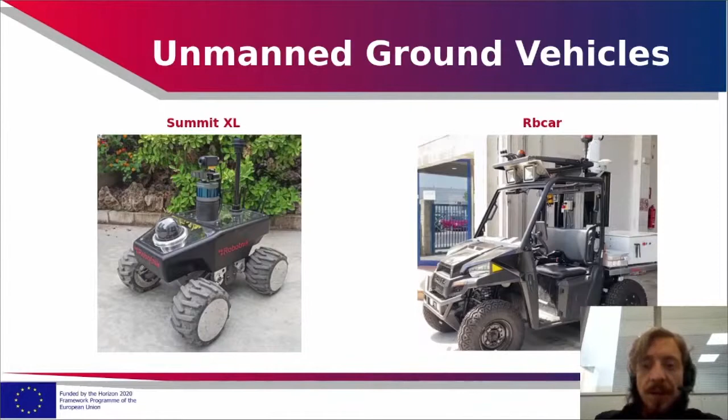These are the two UGVs developed by Robotnik for the FASTER project, the Summit XL and the RB-Car. Both platforms form part of our product portfolio right now, not at the beginning of the project, but right now, yes. Both have been sensorized, taking into account the requirements from the first responders and also the requirements from the pilots of the project. Let's see in more detail the features of the Summit XL.

This UGV is smaller than the RB-Car, and it has a payload of 65 kilograms. It has a differential configuration with 4 traction wheels with 500 watts of power. The Summit has been designed and built totally by Robotnik from scratch, so it's our own unique model, let's say.

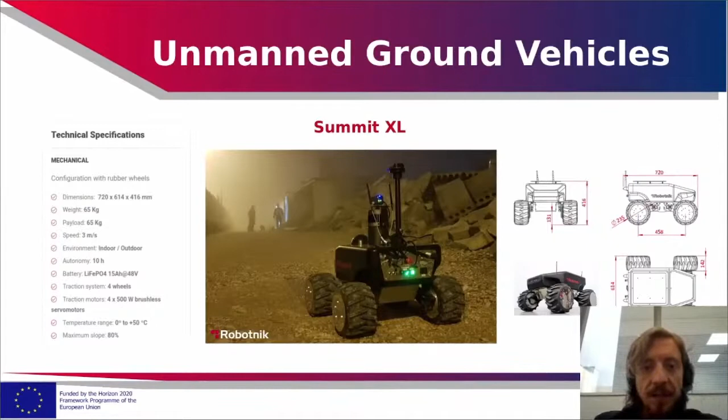These are the sensors integrated into the Summit XL: a stereo camera that we use for creating the 3D map of the environment, a 3D LiDAR to scan the surroundings of the robot, a thermal camera to identify abrupt changes of temperature or detect hot objects, animals, or humans, an RGB camera with a pan-tilt mechanism that allows it to move and focus on any interesting direction, and finally a GPS device to receive the global position of the robot and manage the autonomous navigation.

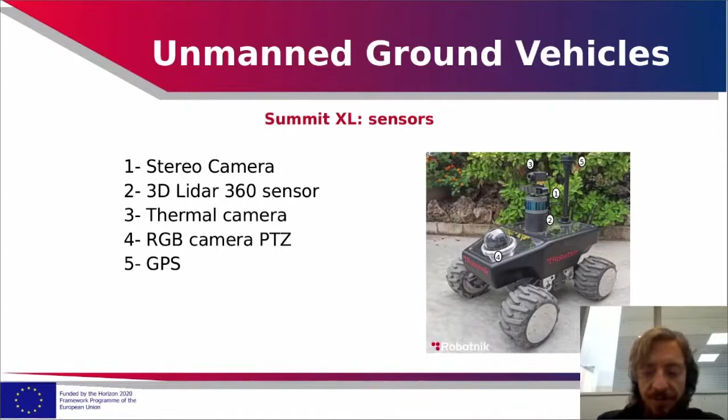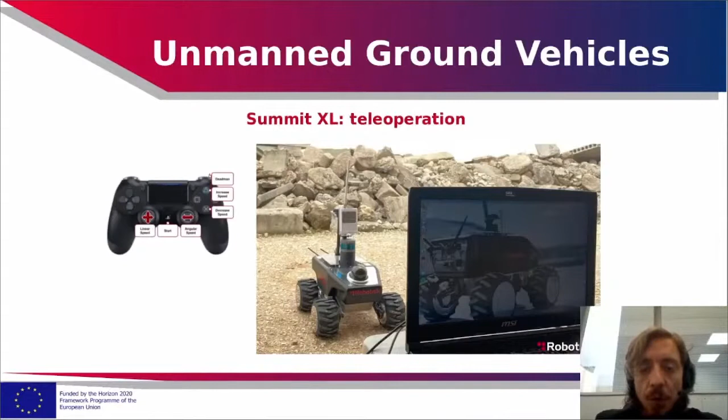For controlling the robot, the Summit XL, we use a PlayStation 4 pad. There are mainly two ways to control the Summit remotely. You can connect the PS4 pad directly to the robot via Bluetooth, which allows a teleoperation range of around 10 meters. The other option is to connect the PS4 to the ground station server, having long range coverage that works with 4G network communication, so there is no limit of range for this communication.

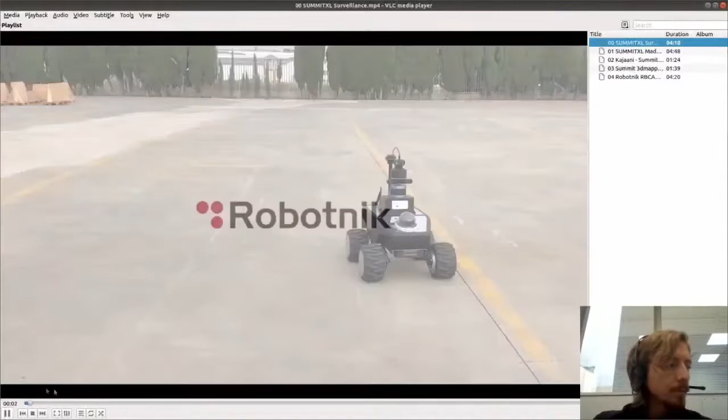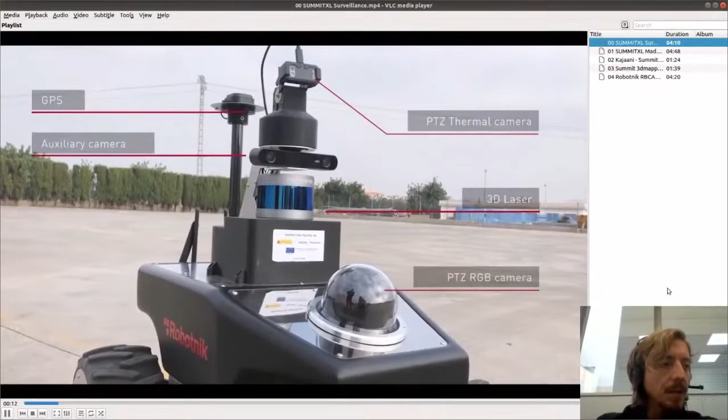Let's see one video of the Summit XL. This is the platform. As you can see, it has a thermal camera, 3D laser, RGB camera, a stereo camera, and also the GPS device.

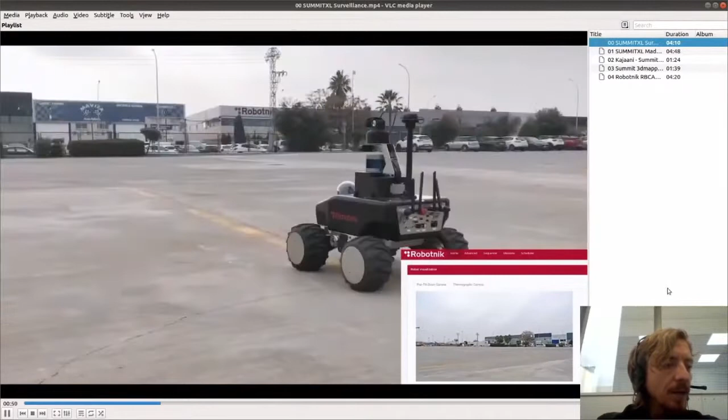Here we are looking at the interface on the ground station server, where we can send coordinates directly to the robot in GPS format, and the robot can move autonomously, while at the same time providing video feedback from the cameras to the interface as it navigates autonomously through the environment.

Of course, the cameras can be controlled remotely as well as the entire platform. Now we are defining an autonomous mission where the robot should reach some navigation points that we have defined in the interface.

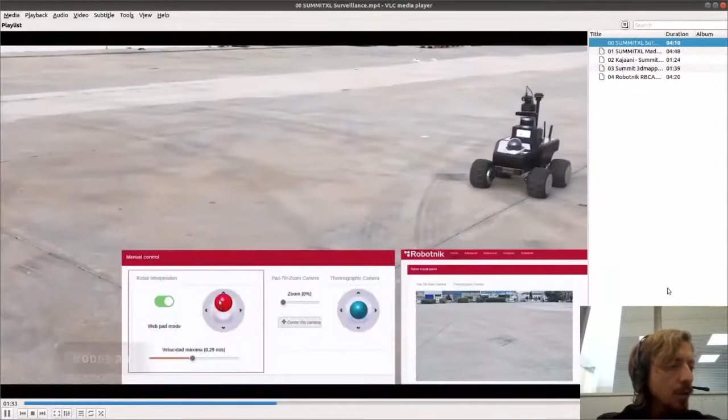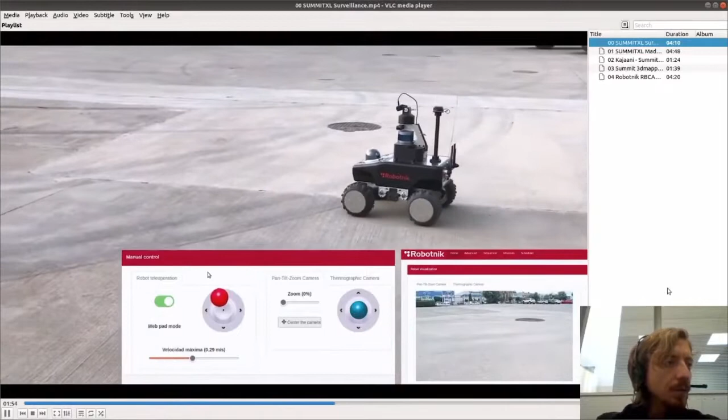We also offer the teleoperation module inside the interface to control the vehicle remotely. We have different controls: one for the entire platform to move the robot around, and also remote control of the thermal camera to focus in any direction. We can also control the zoom of the camera.

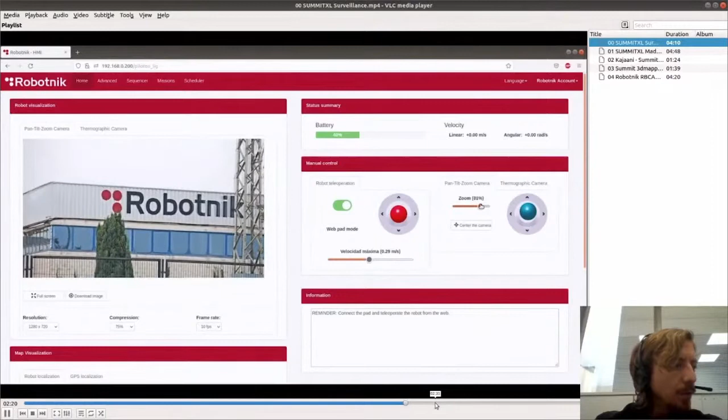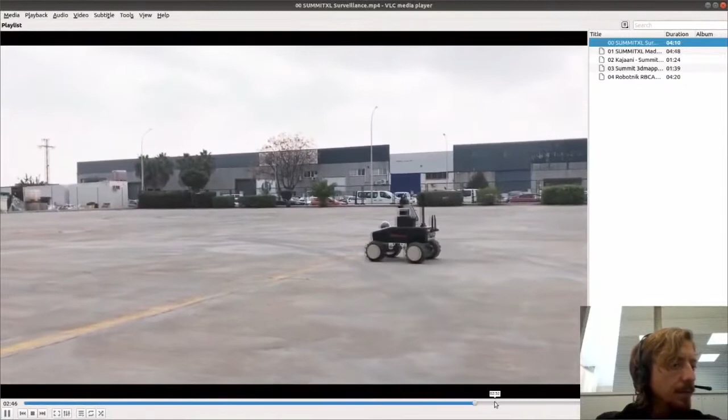This is more or less what we can do with the Summit. We can also visualize the thermal camera here. We have a 2D map of the environment, and you can see the measurements of the 3D LiDAR, along with information regarding the battery and the velocity the robot is moving at.

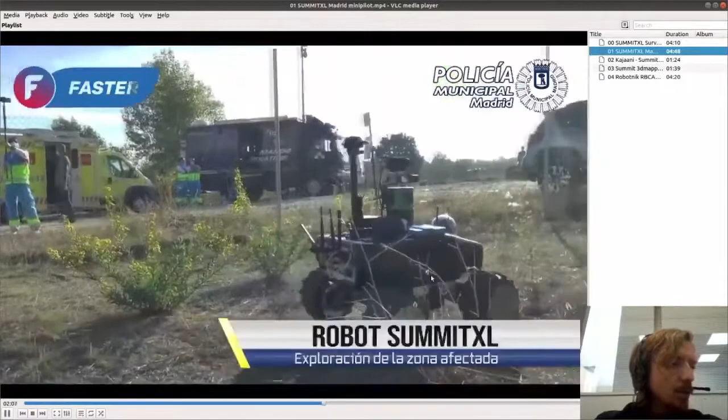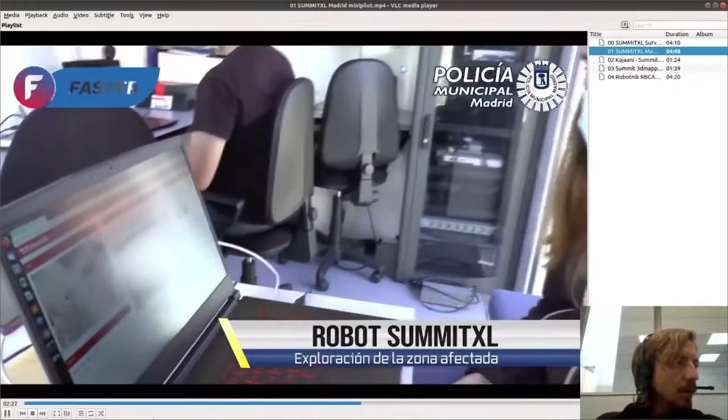Let's check another video, this one from the Madrid mini pilot that we did. In this case, we used the Summit XL to explore the surrounding area of the building, and we were able to identify one person lying in the middle of the ground using the thermal camera. There you can see the emergency team helping the person.

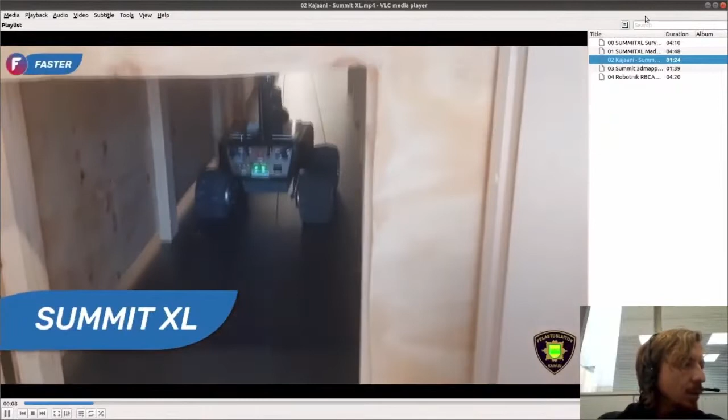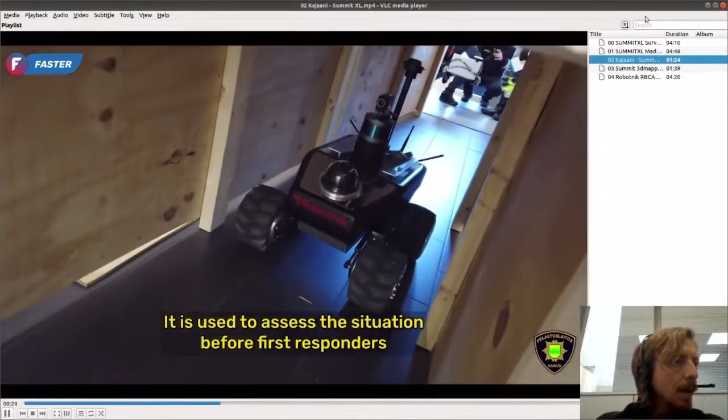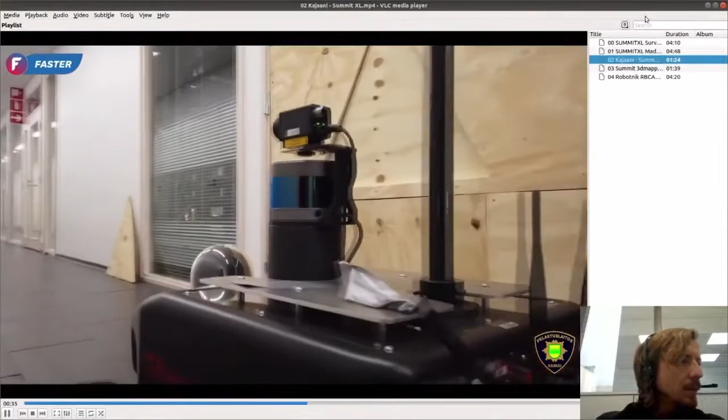I have another video from the pilot in Kajaani, Finland, where the Summit was used to get into a building. As you can see, there was a kind of narrow corridor, and we used the Summit XL to get into the building, checking at the same time the thermal camera image and the RGB camera image.

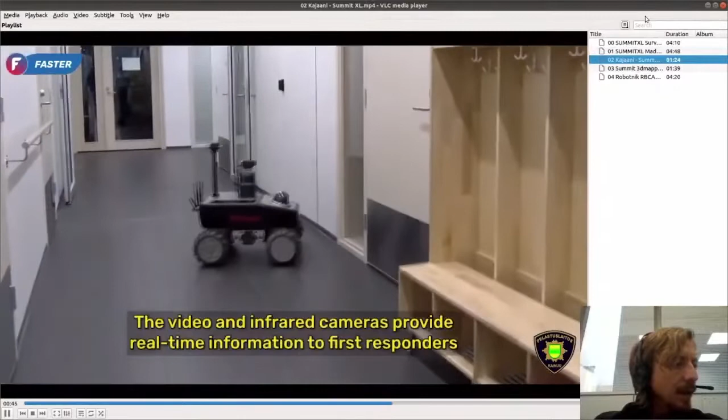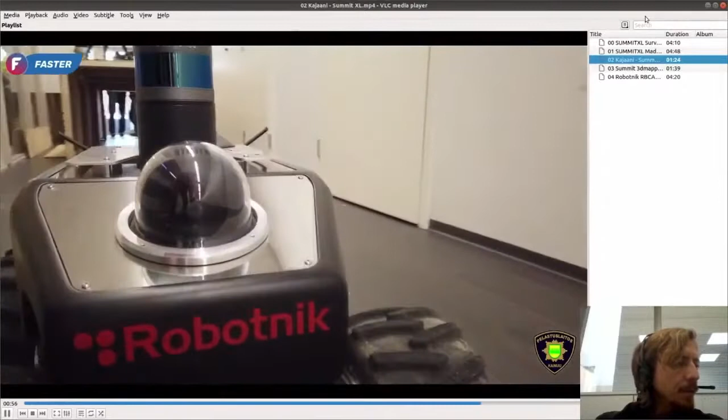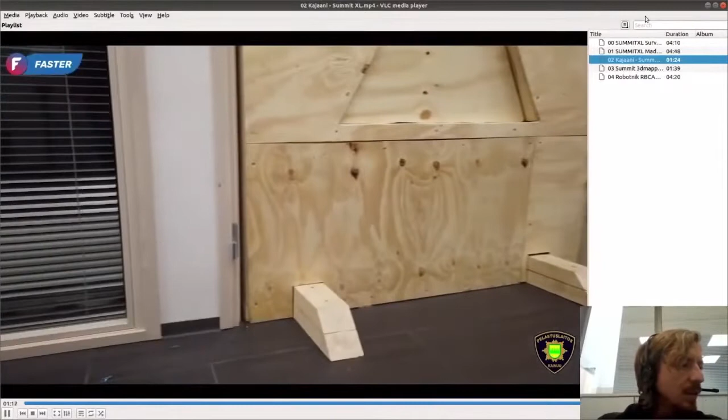Exactly. And also we were testing there the 3D mapping operation. In this case, it was done with the LiDAR, and we create a 3D model of the building, where the first responders could test how was the situation before getting physically into the building.

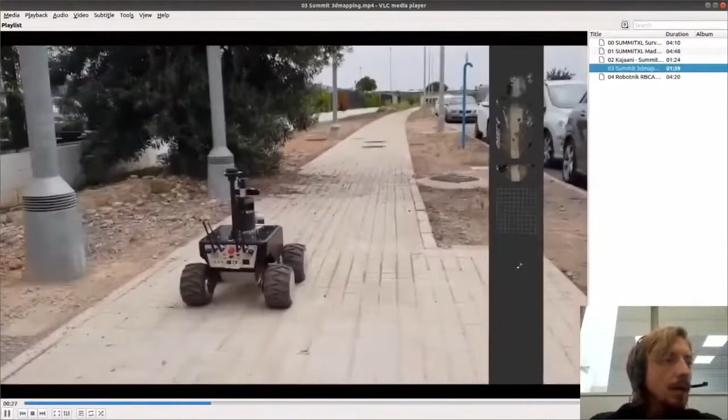I have another example of the 3D mapping operation. In this case, it was done outdoors in the street. We were teleoperating the robot. Here in the interface you can see we are starting the 3D mapping module, and here you can see the robot moving. It's a little bit sped up.

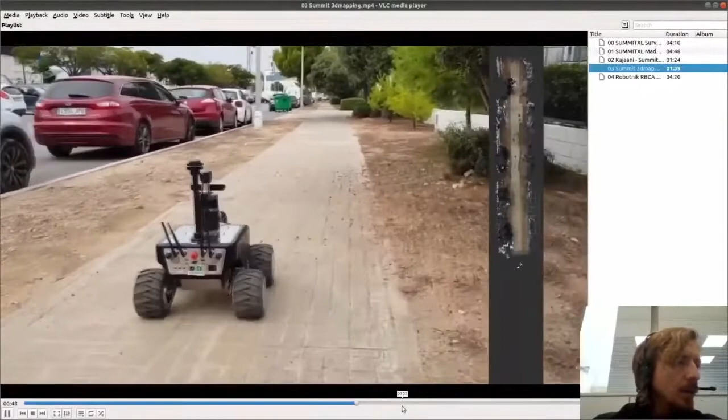The video has been sped up just a little bit, and in the right side you can see how the robot is building the 3D map, creating this 3D map with colors and with the textures of the environment. And then you will see the final results of the 3D map here.

This is the other strategy that we are using. One is getting the data from the LiDAR sensor, and the other one is this one. It's doing the map from the images that we are collecting from the stereo camera.

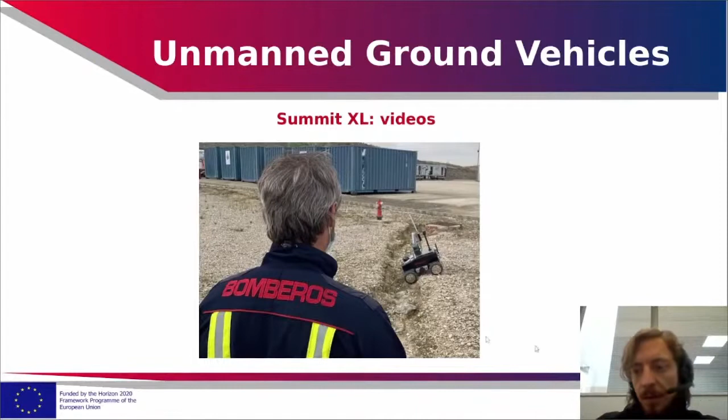Okay, I think that's more or less all about the Summit XL. Let's move on to the Rbcar.

In case of the Rbcar vehicle, we started to work from an electric vehicle that was already in the market. This vehicle is like a car that can be driven by a person. Of course, we made some hardware modifications in order to automate the direction, the brake, the acceleration of the vehicle, and we added some extra batteries to feed, on one side, the vehicle, and on the other side, the sensors and the control box that we are using to automate everything.

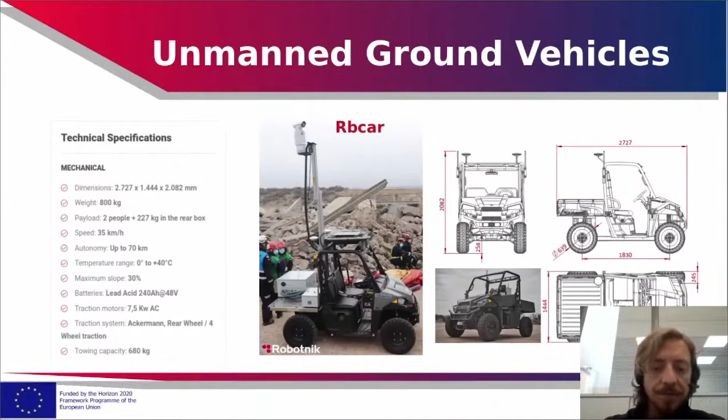It has an Ackermann configuration in this case, and can carry 2 people plus 200 more or less kilograms. So it's quite bigger than the Summit.

These are the sensors that we have integrated. We have 3D front laser sensors for obstacle detection in front of the robot, and a stereo camera for creating the 3D map of the environment like in Summit XL. We have a 3D LiDAR also for detecting the surroundings of the robot.

A thermal camera that in this case has been mounted in a crane. We will see in detail in the next slide. And powerful lights for working at night, and of course the GPS device for the global localization of the vehicle.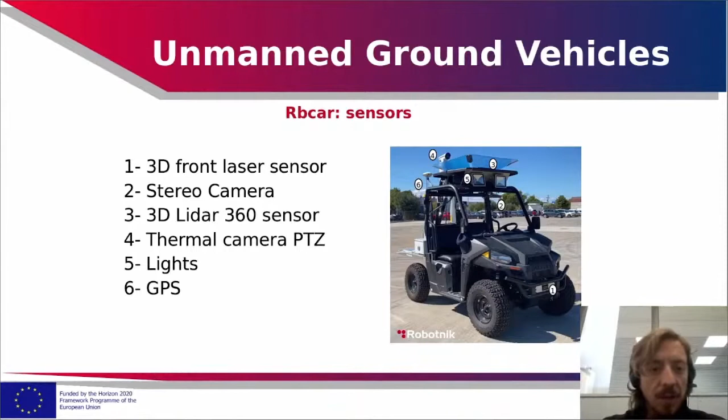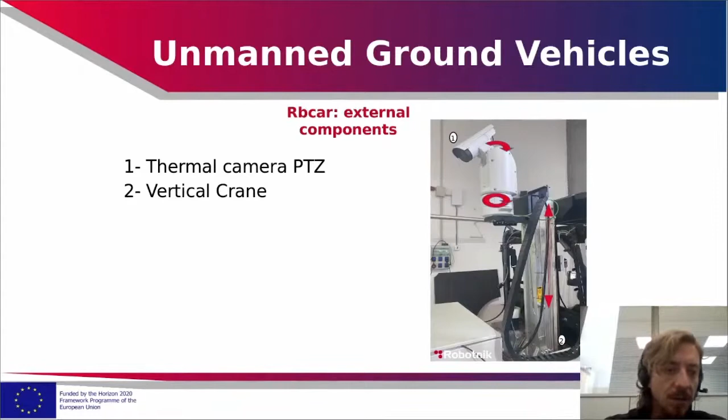As I was saying, the crane is this one. We built it from scratch. With this crane, the camera can reach 3 meters of altitude, and it has also a pan tilt structure where you can move the camera in any direction.

For teleoperating this vehicle, it's different than the Summit XL. In this case we have a secure pad. This pad is connected to the vehicle by radio and has a maximum range of around 1 kilometer, more or less.

The main difference is that this secure pad has an emergency button, so in case that something goes wrong or something is unsecure, you can just press the button and everything will stop, and the entire vehicle will be stopped.

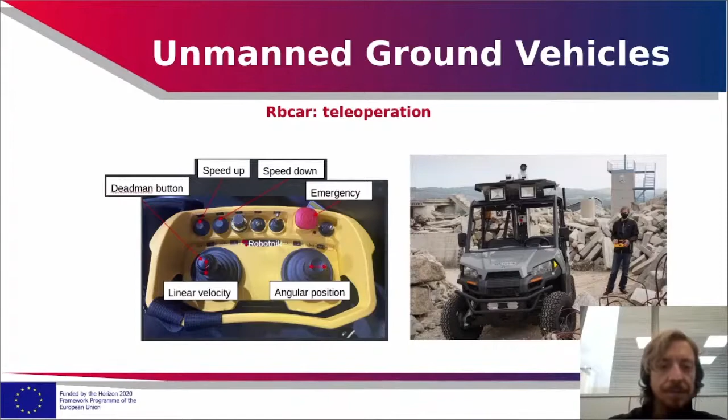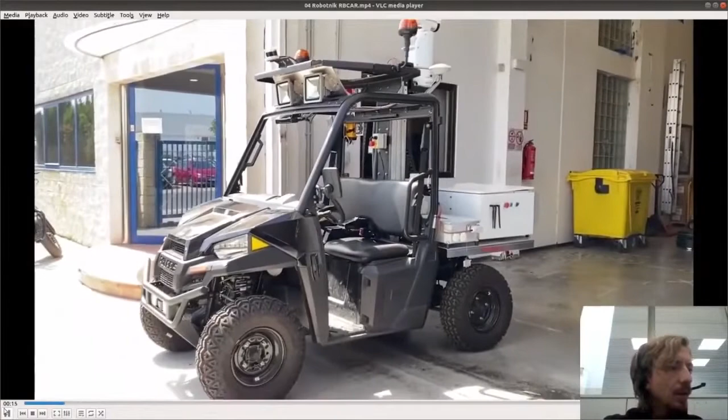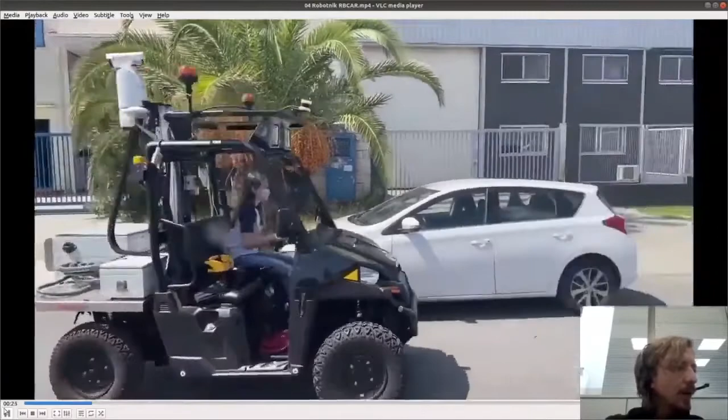Let's check one video about the Rbcar, how we think it can help in emergency situations. You can see here how is the size. We think that probably we would be able to reach the affected area driving the robot manually, as you are seeing.

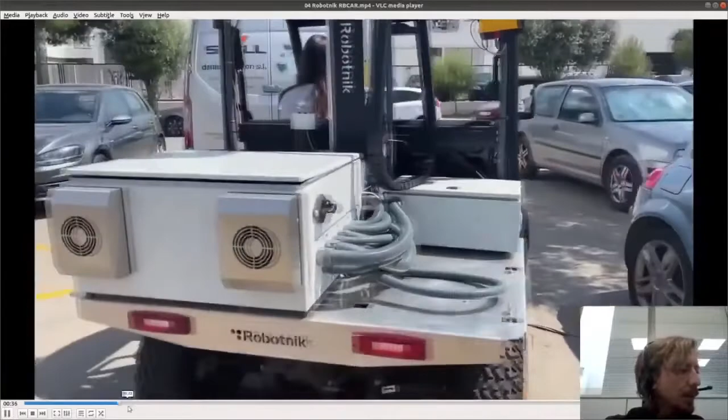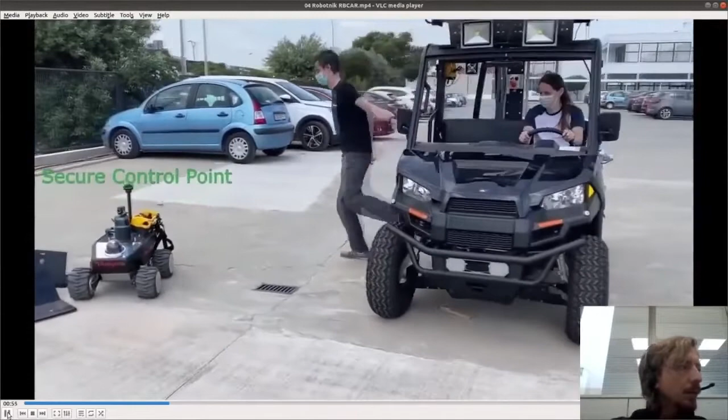I will move a little bit. Okay, so let's say that we arrive to a secure control point near the affected area. One person can get out from the vehicle and the other one can keep driving to be closer to the affected area, like that.

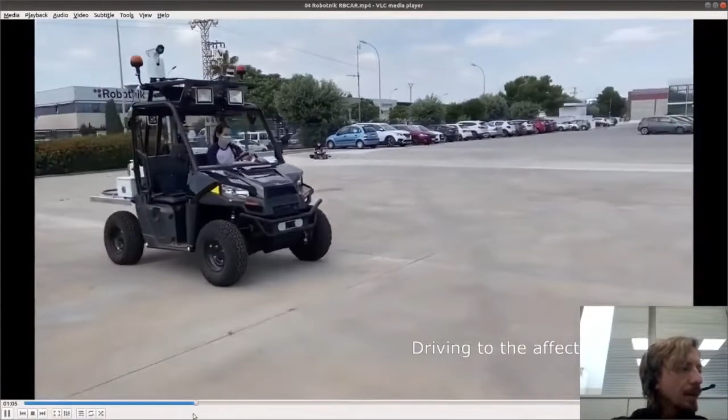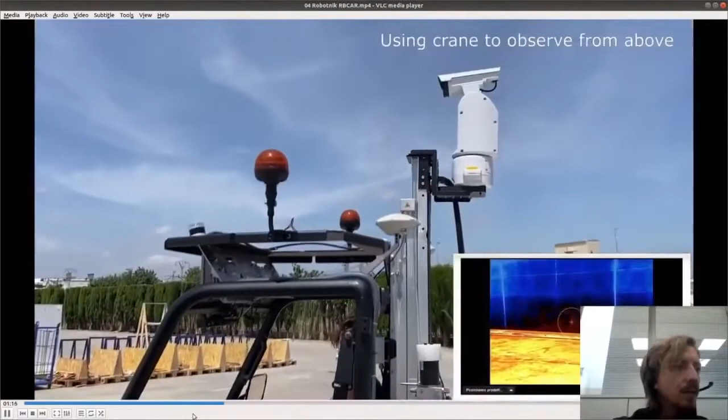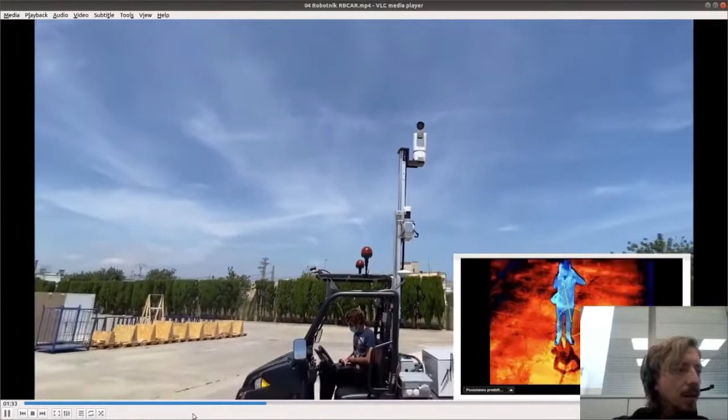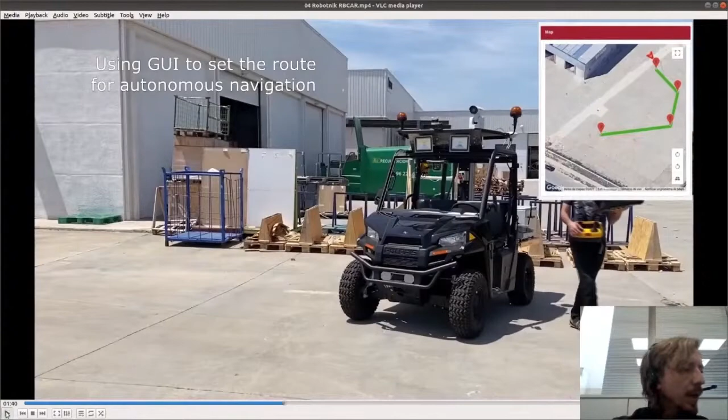And then when it arrives, it gets out from the vehicle and uses the crane to observe from above with the thermal camera what is happening around. If we can identify something with the camera, detecting some object that can be interesting, then we can use the interface to send the robot again to the secure control point autonomously.

Here we are, at the same time while the robot is moving, we are seeing the camera object identification, where we will see some object description here when any object is identified, like other cars or people. On the top right square, we can see the trajectory that the robot will do autonomously, and on the bottom we can see the thermal camera streaming in real time.

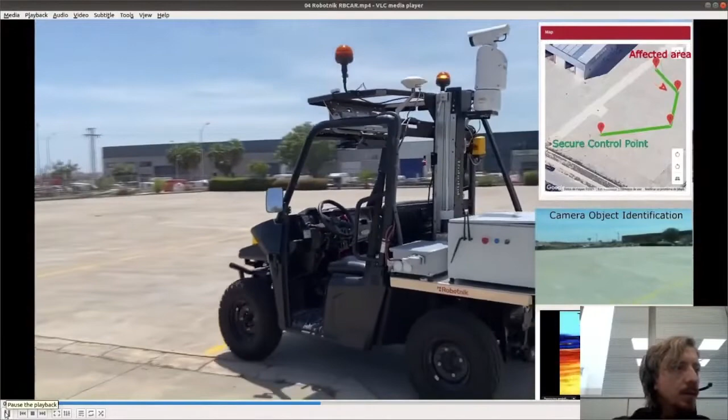So the robot, when it's moving autonomously, the lights are blinking all the time, just to show that it's in autonomous mode. And as you can see, it's following the different points of the trajectory.

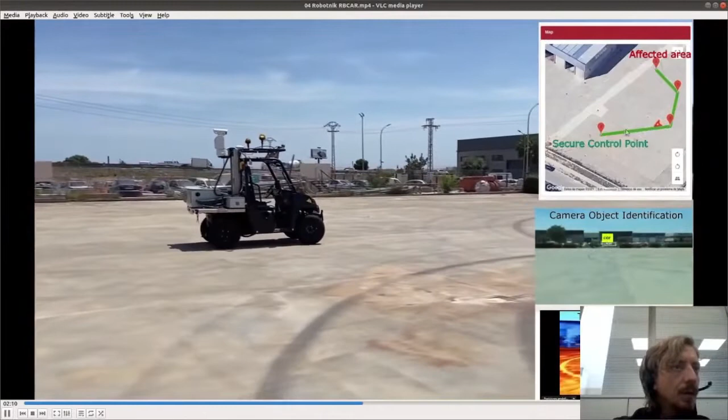Here you can see the objects that have been identified, like other cars, by the camera. And finally it reached the control point.

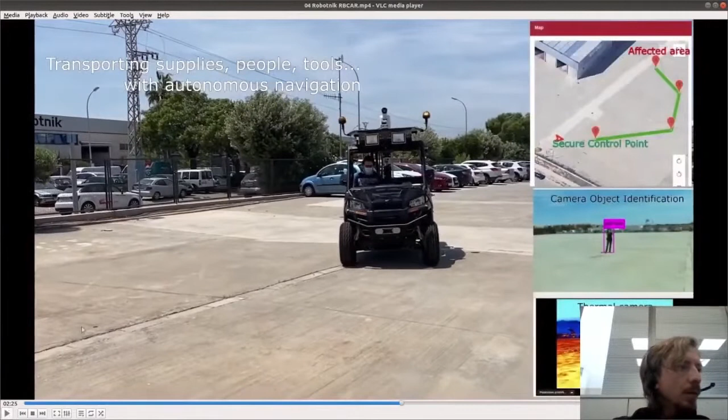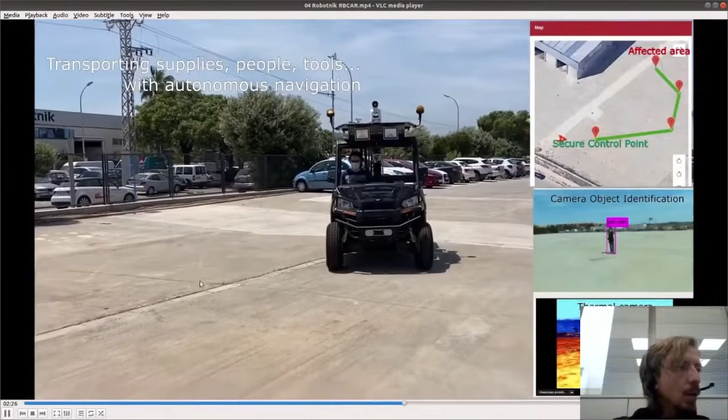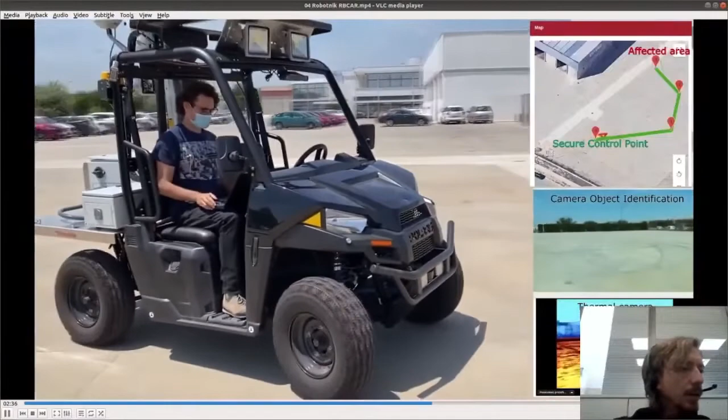So then another option is to transport supplies, people or tools again from the secure control point to the affected area, like right now. You can see one person is in the car, but the car is still moving autonomously, and it goes to the affected area, yeah, autonomously.

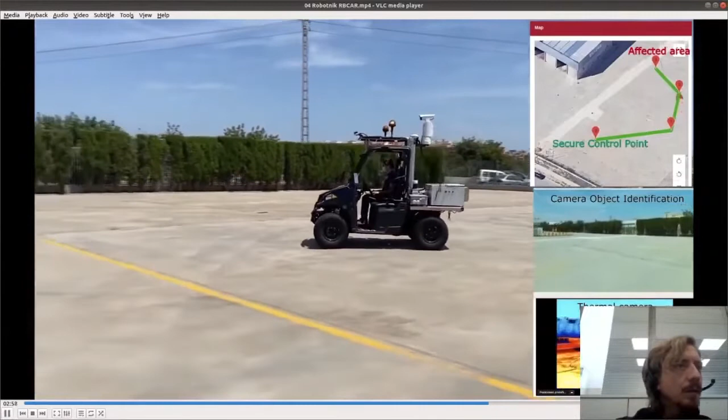So it's following the trajectory, and then finally it arrives to the affected area.

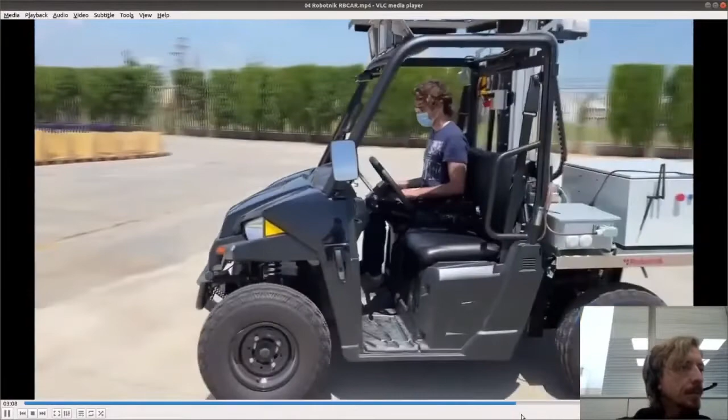From the perspective of the driver, to see how it feels.

This is another example of an autonomous navigation. We have defined a square of four points, as you can see here. And yeah, we are inside the vehicle while it is moving autonomously.

Okay, I think that is more or less clear, the idea behind these autonomous ground vehicles.